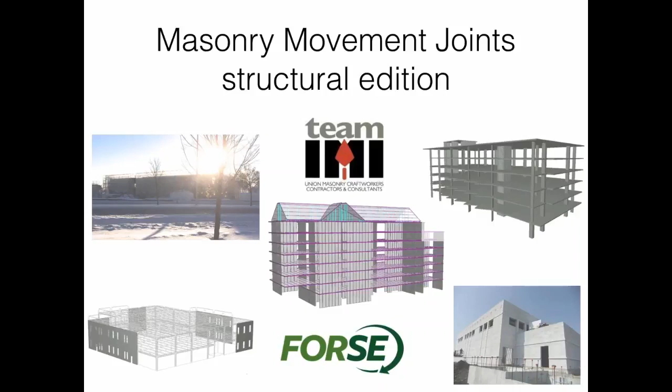All right, so what we're going to talk about today is masonry movement joints. You guys have probably talked about or thought about movement joints. A bunch of different things here.

So learning objectives: learn a little bit about movement joint definitions. You guys have probably seen a variety of these type of talks from the architectural perspective, so there's going to be some overlap, but I'm going to try to talk about why movement joints are important to engineers, why an engineer might say no, we don't need any movement joints, or we need more movement joints, or some of those different things. So there's overlap, but I'll cover why it's important to engineers or how you can help them out. I know you guys love to help out engineers. We'll cover movement characteristics of masonry materials and systems, movement joint purposes and locations, and then knowledge to design and detail movement joints and stuff like that.

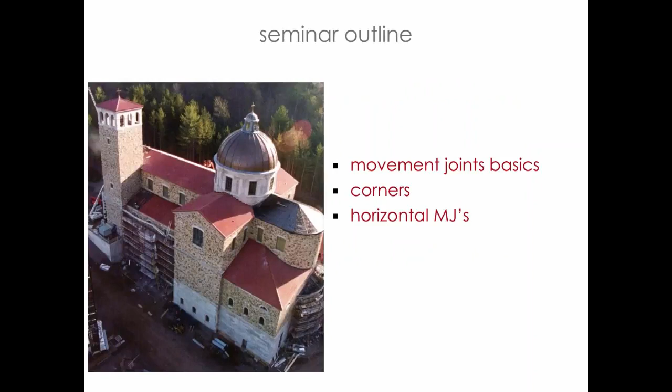So we're going to cover those basics, cover what goes on in corners, both for structural and for veneer. Talk about horizontal movement joints - I think that's a really good terminology, because sometimes we get a little bit confused about what's going on with those horizontal elements. We'll cover effects for structural, and then the all-important issue of when we have openings, and we have more and more and more openings - how do we deal with these openings in an effective way?

So, movement joint basics. The biggest thing about movement joints - and this is hard to see when we review projects, and we do that a lot for the Structural Masonry Coalition here in Illinois. My company does a lot of consulting work in Wisconsin, Iowa, Kansas City, New Jersey, and all kinds of different places. When we do project and plan reviews, probably the most heartbreaking thing I see when reviewing masonry details - well, there's a couple heartbreaking things - but one of them is when there's a note in there someplace indicating movement joints just based on a code reference, right?

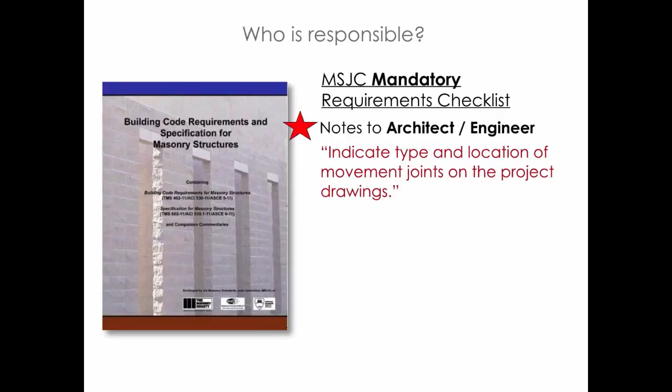What we really need to do is be very specific about where the joints need to be horizontally and vertically on our drawings. I think we really need to do a lot better with that. Maybe in schematic design we can throw a note in there, but even then it's probably not a good idea. And the other thing about movement joints - a lot of times when we talk about movement joints, there's a difference between veneers and backups, or CMU veneers versus structural veneers. So I'm going to talk about those before we get even deep into any of the pretty pictures that I have for today.

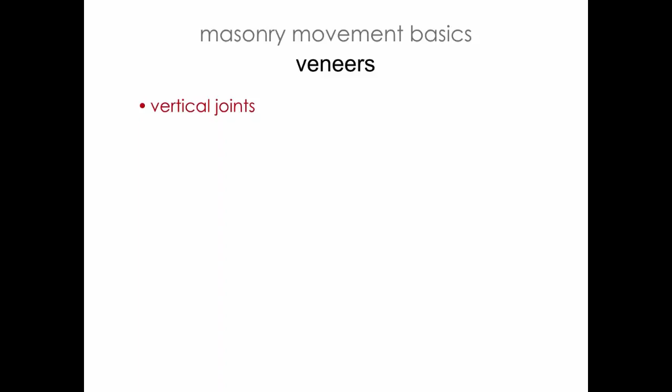So the vertical joints that we have are needed to prevent cracking. Anytime we have a veneer, what we're trying to do is provide a plane within a wall where the wall is going to be able to move, without forming its own movement joint.

That's what we're trying to prevent by putting these joints in there. We're trying to prevent that undesirable cracking by putting in this purposeful, essentially, a crack in the wall. Needed when there's a differential support.

Sometimes we have different conditions where we have veneers that are kind of spanning over different types of elements structurally. Sometimes there's differential support in how we support those veneers. So there's another place where we want to put a joint.

And then rarely, if ever, would you ever want to eliminate a vertical joint in a veneer. So I'm going to talk about when we maybe want to eliminate some of these vertical joints, but I'm not talking about veneers. Horizontal joints in a veneer, it's needed to allow for differential movement, and that's not the same as differential support. Differential support is for when I have a veneer in an elevation, maybe got two different elements supporting it.

Maybe one's a foundation, one's a beam, as we go on a slope site or something like that. So differential movement is the actual veneer and whatever it's holding, giving it its support. A lot of times that support is going to be moving vertically. It's going to be settling, especially if it's, and I apologize for any wood people, but if it's an inferior material. Wood isn't used because it's superior to brick, it's used because it's available and all these other reasons. It moves a lot.

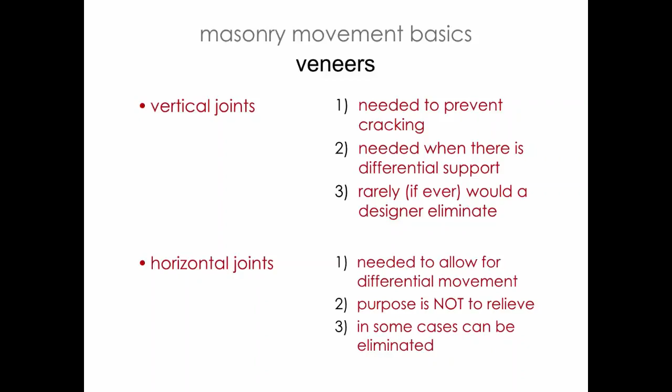So again, vertical joints, rarely do we eliminate them. Horizontal joints, we certainly can think about eliminating them. But this stuff is in the veneers—because when I flip over to the structural, the backup, the CMU, the stuff that's behind it, or if it's a single wythe, then it's going to be all applicable. Vertical joints, again, needed to prevent cracking—we want to prevent the unintended cracks from forming in the wall.

They can be used structurally, vertical joints sometimes are added to isolate a certain element. I don't know if you guys ever do design in a high seismic area where you get into specialty detailing for a shear wall element, and that's not something you necessarily want to do for the entire structure. So sometimes vertical joints are more than just thermal control to prevent cracking - sometimes we're trying to isolate an element structurally so we don't have to have all this special detailing.

for seismic response everywhere in a building. In some cases, we can eliminate them, and I think there's some cases where we absolutely should eliminate them. When I say eliminate them, I mean from the standard prescriptive ways you think about control joints. There's plenty of locations where we can move them, eliminate them, get rid of them.

I did a presentation a couple weeks ago in California, and they said, well of course you'd eliminate them, we have plenty of horizontal. Yeah, there's certain areas of the country where you just don't need horizontal or vertical joints in that structural wall. So in some cases they can be eliminated - for the Midwest, for 90% of the country that's not California. A lot of times we just get into the mentality that we have to have these joints in it.

We have to put them in, it's just what we have to do - there were so many problems when we didn't have those joints in it. Well, okay, yeah, common construction methods used throughout most of the United States and all over the world, you probably want to add them, but there's still certain situations where we want to eliminate it.

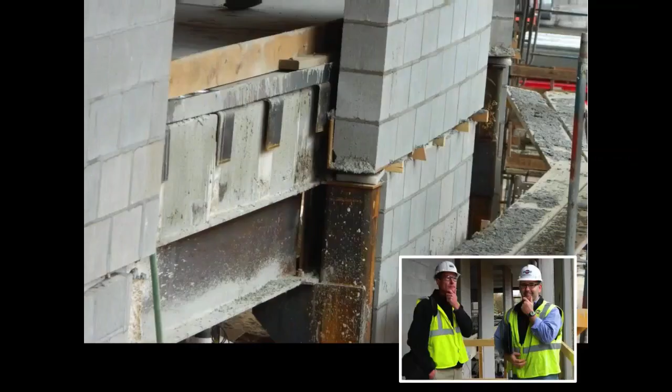Not anything that, because brick didn't need to be relieved. The backup, the CMU wall, definitely doesn't need to be relieved for many feet high - 28 stories, 30 stories, we're talking about some high vertical masonry. So that's just - and again I'm not sure why this happened.

This is a bad design. I can't say anything about it in a good way, but I'm not sure why it got into this project, or whether it's going to be common, or hopefully none of you guys ever see this. But if you do, this should raise some red flags, because masonry just doesn't need to be relieved.

Brick doesn't need to be relieved. We're trying to panelize these brick veneers and add these horizontal joints for specific reasons, for how we're tying to the backup. And so the thought process here is, we're not tying to a backup - this is the backup, and it can support itself. It's just adding more and more weight to the structure that's behind it, and it's just not something we want to get into.

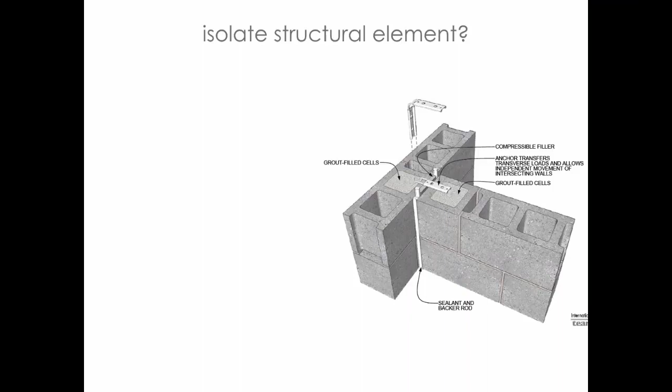So in terms of isolating those elements, it's not just for shear walls - I think that's a really easy example for us to think about, but also for partition walls. Partition walls within the current code - and I don't love the language - it says it's a wall that doesn't have a structural function. I'm like, well, but a structural engineer still needs to participate in the design of them because there's structural loads on this non-structural wall. But anyway, I think we need better terminology.

It doesn't have a lot of load, it's got some partition wall loads that are going to be applying pressure to it. If it's in a seismic region, it's got inertia forces due to its own self-weight that you have to resist, and stuff like that. But partition walls - what the code is trying to say is, I don't want to get any unintended forces in there. I don't want to drag in some unintended shear load or vertical load into this element. It should be a relatively simple element.

And that's why when we go into intersections, when we have an interior partition wall framing into an exterior wall, a lot of times it's a good place for a joint - because it's just more complicated than it needs to be. And it's not a partition wall anymore if we suddenly have a hard joint there, creating that T-section.

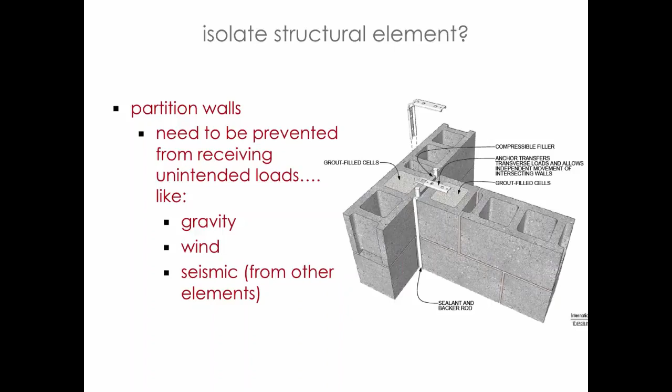Yeah, so it can be gravity, it can be wind, it could be seismic from other elements. In seismic events, it's got its own self-weight it's got to take care of, that structural load, even though it's a non-structural wall.

This is what I would call the more common case, right? Maybe we have a bearing wall taking the out-of-plane pressure loads on the walls, but then maybe there's one element taking the out-of-plane pressure loads, the vertical loads, and the shear loads. And we have openings, and we have 24 inches past the edge of the openings where we have to place bars, and we need all this horizontal reinforcement because it's a specially reinforced masonry shear wall. It's kind of a big deal.

But we don't want to do that everywhere, so sometimes we'll add control joints to isolate those locations.

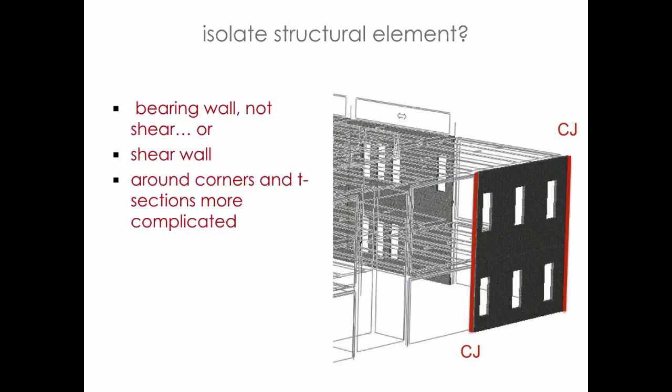And so I say that, and I think I have to put this little caveat in here. Sometimes I say isolating, and everybody's like, yeah, we've been isolating forever — we now isolate these shear walls because there's openings. This is not what I'm talking about. These are not places where I want to put control joints just because there's an opening there. We're going to get into this in a lot more detail.

Shear walls should look like this from a structural engineering perspective. We can go well past those openings. Maybe we still want to isolate them — we don't want to go too far to have to add more than minimum reinforcement. But it's not openings that are going to create the need for control joints. But like I said, we'll talk about that.

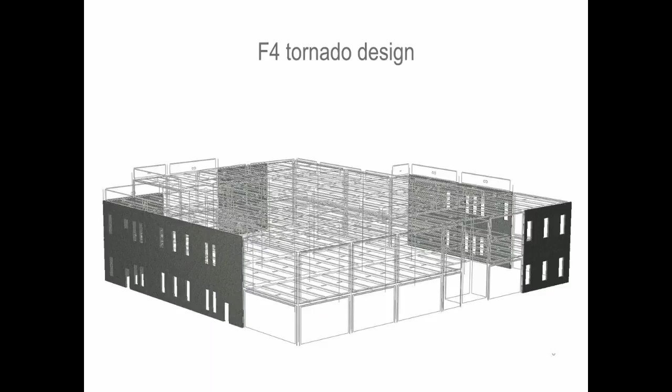So I guess movement joints have some three basic factors. All buildings move. CMU shrinks and bricks expand. So we kind of have buildings moving around vertically, horizontally, with lateral loads that are going to be applied on structures. We have masonry that does shrink.

If you're an engineer, when I say shrink and I say movement, all of a sudden I start correlating it to concrete, and it's not the same — it's not the same minimum reinforcement requirements that you have with concrete. It still has some thermal loads similar to concrete, but again, it's a lot less volume. So when I say shrink, I mean shrink, but I don't mean the same thing as when I talk about concrete elements.

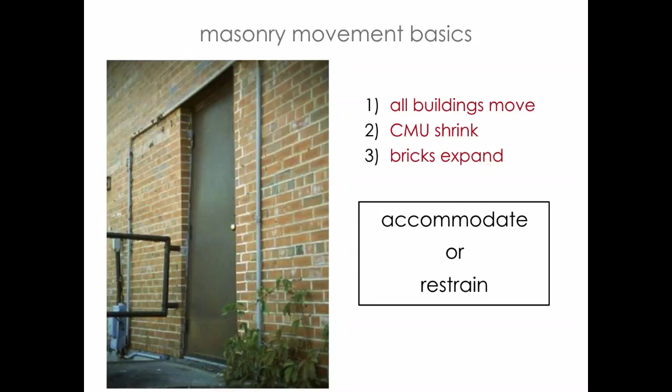All right, so movement joints — we have CMU, we have the backup wall, we have a control joint within the wall, and it's really a different thing once we get out to the front, you know, expansion joint. I'm not so touchy about it. I think other people get a little bit more touchy about it, but I think it's a good terminology issue that we should consider.

Just like the whole relief angle thing, you really need to think about what the joint is doing, how it needs to function, and the purpose for putting it there.

They don't need to align. They shouldn't align. I can't think of why they would ever align. Somebody told me once why they thought, but then I forgot about it, so it must not have been too important. It's usually not something that I think would be good for overall use of the building — there's just no purpose in the two of them aligning.

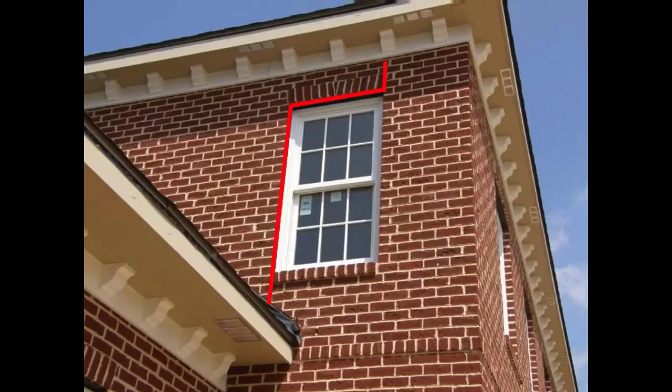The isolation joint - when I was talking about differential supports, I think this is a really good example. Again, this is a veneer. We're looking at how this would be supported, maybe here by the foundation. But then if I get up over the roof, it's not going to go all the way down the foundation - you probably don't have brick going all the way through the roof and wall system, it's going to be supported on the roof. So we probably need some sort of joint there, to isolate that element, go around the window and allow it to move vertically different than the piece sitting on the foundation. We can see a few more examples here.

Hopefully you guys weren't expecting me to talk about colors. I'm an engineer, I'm kind of colorblind. Every time my daughters ask me for clothing advice, I'm like, are you sure you want this? I can give you some advice, but it's really not going to help out too much. So in terms of the color of the joint material, you're kind of on your own, I can't help you there. But location-wise, based on what we're doing structurally, I can help you with that.

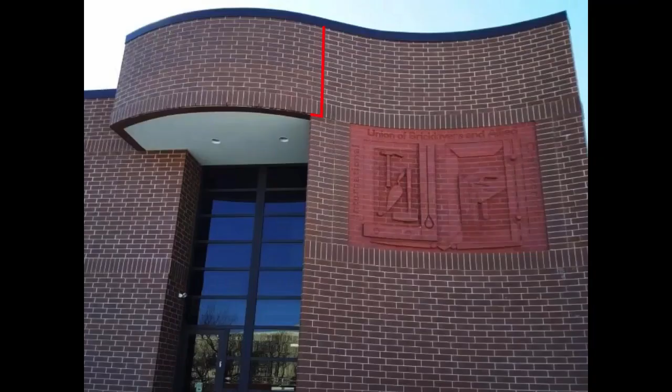This is another good example. Again, it's not differential support in terms of one sitting on a foundation, but this is going to just move differently because it's over this opening. That lintel is going to be moving, especially this kind of cantilevered curved veneer. We need to look for those type of situations in our designs. If we're creating something aesthetically pleasing with irregularities and stuff going on, this just feels like it's going to move differently - it's going to be deflecting and twisting and moving, and that lintel is going to be doing something differently than what we'd have going over just the foundation. So we have to think about that as we're locating those joints.

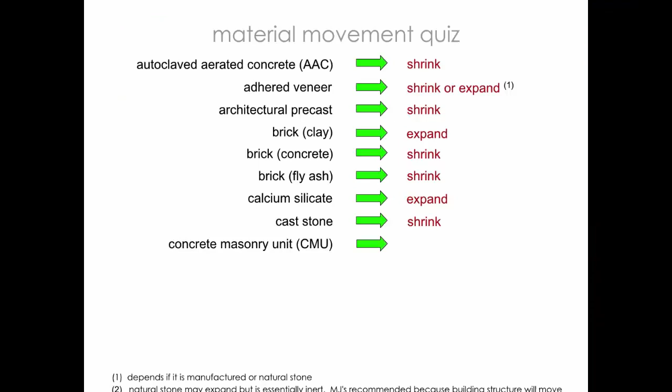All right, a couple more - we have stuff going all over the place. A lot of it, the clay products, certainly the natural stone, which got a little note down there - sometimes it does, sometimes it doesn't. Terracotta tile, brick, all of those things are going to be expanding as they take on moisture, they're going to just grow over time, and they're never going to come back to the initial place of when the product was made. So it's kind of going to be constantly growing over time. All the concrete, cementitious products are going to be shrinking over time. So it depends on what you use for veneer. A lot of times I'll talk about an expansion joint in a veneer, and that's not necessarily always the case if you got a different veneer material than a clay product.

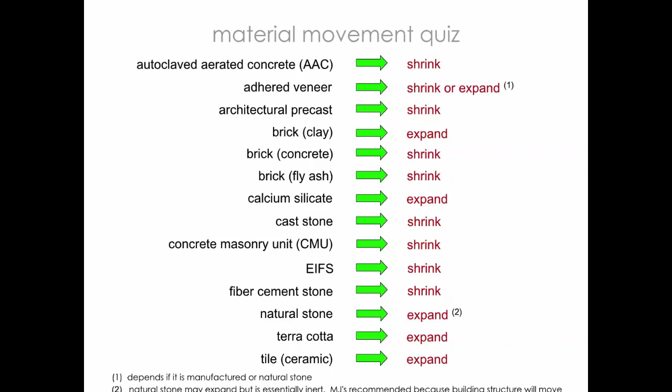We talk about constructional joint widths, and I think sometimes in these seminars we can throw some of these numbers out. I'd be purposeful about this stuff, you guys. Put this stuff in your notes or on your drawings, and try to be as specific as possible, because sometimes a contractor might say, hey, why is this dimension here - but that at least starts a conversation. I think that's of the utmost importance, is making sure we're putting down our design intent as much as possible. Yes, it's going to require a little bit more time as some of these nuances come in, but it at least creates that conversation. I think that's always very, very important in our designs.

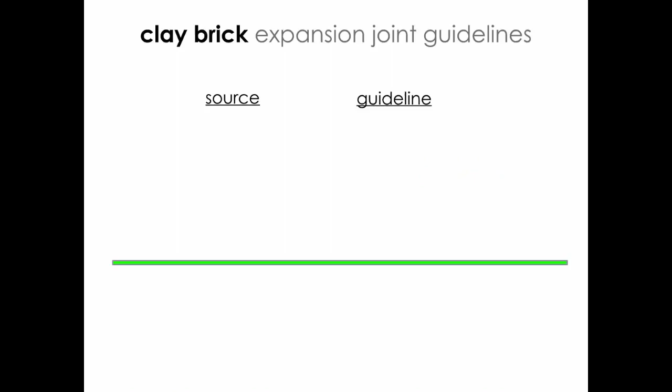And your clay brick joint is going to be a little bit wider, because that brick's going to expand and fill in that gap. There are some nice little guidelines here for what BIA gives for the distance between where you would need joints, and IMI.

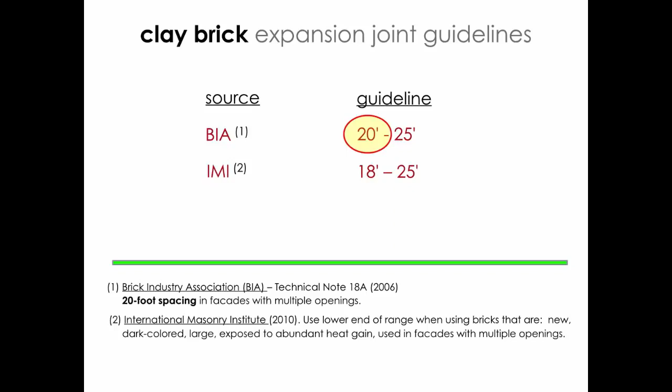20 feet, I think, is kind of an accepted distance that we would have there. And then when we get into the masonry or the backup wall, it's 1.5 times the wall height, not to exceed 25 feet. Some of these are things that I think are good for most situations, but I like to challenge things.

If you got my bio, I'm a software geek. I'm a guy that travels with a bigger technology bag than my overnight bag. Everybody's like, you want me to take this bag? It's bigger. I'm like, no, that's my stuff. You can't touch my technology stuff. Take this little bag, it's got all my clothes in.

That's not important. What I like to do is take these industry standard things that are out there, empirical designs that cover a lot of situations, but I like to challenge some of that. Does it really need to be at this distance vertically or horizontally? Let's analyze it, let's think about it, and let's look at it. We'll talk about that a little bit.

But like I said, in the construction documents, we have to be really purposeful. Put those control joints on plans. Since we created this slide, on plans is kind of the common way to portray the information structurally.

In my last 6.5, almost 7 years of being a consultant to IMI, I've actually convinced a few engineers to put control joints on their elevations of their masonry walls instead of in plan, which I think is a really good idea, especially if they take to heart some of the things I'm talking about regarding reinforcing, analyzing, and design, being very purposeful about lintel reinforcement and reinforcement within a wall. So I don't think that's a bad idea.

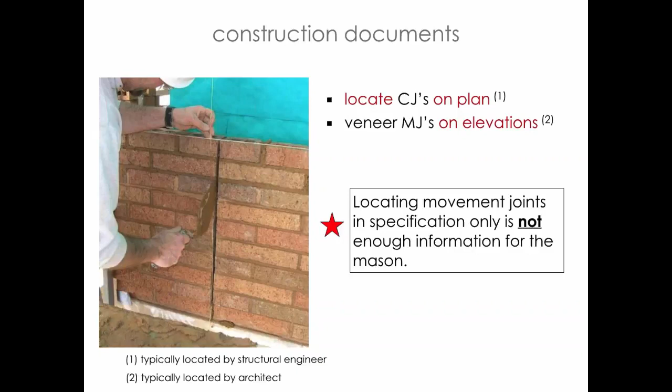Locating movement joints in specification language or in general notes, or even having any notes in there to say anything other than see the plan, see the elevations, right? If you could put anything in there, don't create a conflict of information. Make sure that you point to the plans or elevations that we're talking about.

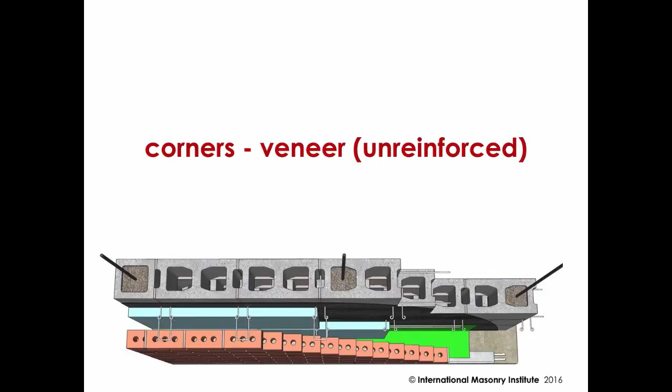Corners, sometimes when I talk about corners, looking at the veneers and cracks that you have there, this is mostly what you want to think about for an unreinforced type of construction or unreinforced masonry movement joint situation. So a lot of times we can put on the plan, or have this mentality, that they should be at 20 feet on center. So anytime you have a plan, 20 feet on center, 20 feet on center, going around the corner, we have to think about what's going on in the actual corner.

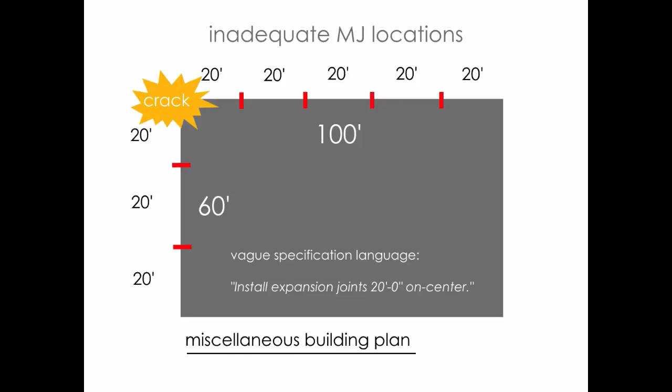Because we have too much thermal load, or moisture load, that's going to be created by those bricks expanding. That's going to be coming from two different directions here and causing a little bit of cracking there. So you can kind of see how both of them are going to be... I really can't pick anything up with the sun.

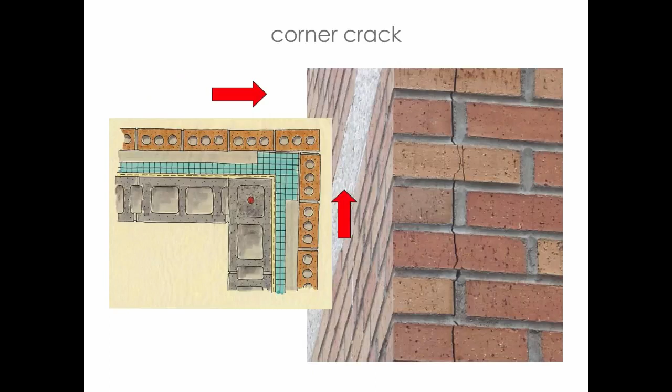You add the distance around the corners. There's a really good way to think about it. A lot of times you probably have a shorter distance in one direction, maybe a couple feet, and then maybe close to 20 feet in the other. So that just prevents that growing from kind of coming together at a corner and cracking.

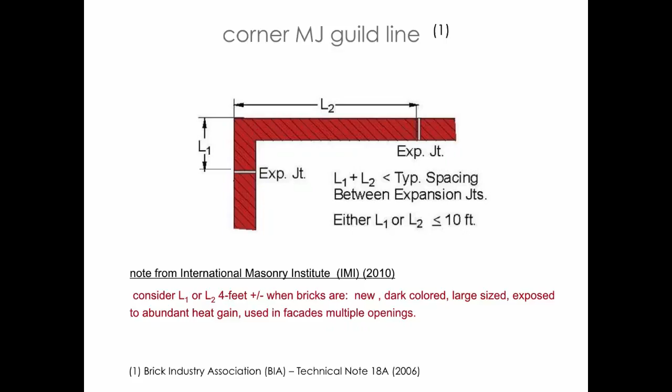Right? So this is sometimes an office standard that I talk about. If you're adding those distances around the corner, sometimes we already have kind of this preset, 2 foot, 2'8", or something like that, that contractors like to use. So it's usually not like 10 feet and 10 feet—it's usually got a shorter distance.

And then those inside corners, we've got to make sure that we give our veneers places to move, even when we go inside the corners, especially again—we've got a couple different products going on here at this cathedral up in La Crosse, Wisconsin.

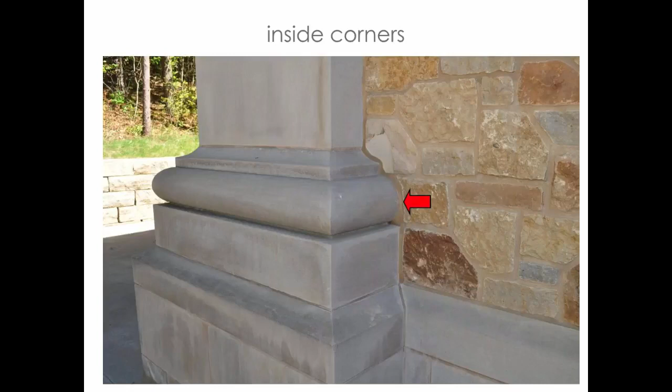Yeah, and then especially when you get to those acute inside corners, I think that stress can be even easier to show, and show some distress with the crack at the corner, if we don't have joints nearby.

All right, so shelf angles, veneers, and how it affects backups. I think shelf angles—again, or relief angles—are things that certainly you guys need to think about. You need to talk to your structural engineers about what we need in terms of shelf angles.

Certainly having those horizontal movement joints, those shelf angles, they're in there to allow the brick to grow, so that you can have a gap at the top of the brick, below the shelf angle, so that it can move and grow a little bit and not put undue stress or create differential movement with the structure behind.

So to think about the shelf angles, they certainly are an added cost, right? And so we have to think about that as we're thinking about, well, do we really need them? A lot of times we do, but sometimes I think that we could start to challenge what's in the code in terms of an empirical design. Functional, liability, gap corrosion, flashing, thermal transfer—all kinds of stuff going on with these shelf angles.

And there's a couple of slides in here that kind of show some what I call creative ways to create an offset shelf angle. I think that those are good ideas for mitigating some of those issues. But I think, again, maybe eliminating them altogether might be the right design for your project.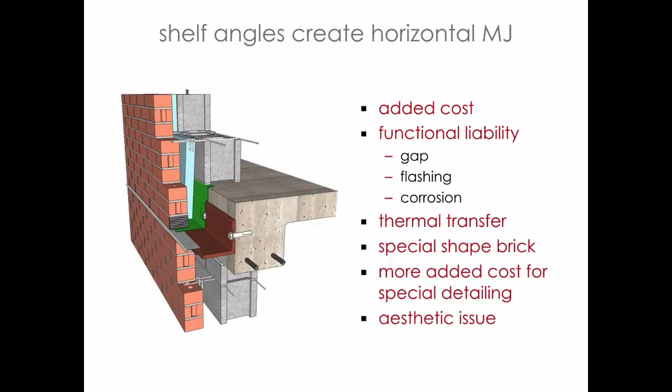Special brick shape, added cost for special detailing. Again, aesthetic issue—that was definitely not my bullet point, somebody else put that in there. Aesthetics, I'm an engineer, I don't understand what that word means.

All right, so shelf angles over metal studs or over wood construction, right? You guys are all really familiar with this note, right? It's at the height that you can go with brick veneer, or with a veneer, before you would need a shelf angle—is 30 feet.

And so how is that number determined? Right? How did they come up with that? It's based on a bunch of data of existing structures and kind of what worked and what didn't—what height did we start to see some problems with the veneers growing and having some issues with how the veneers are then tied to the backup structure.

And again, when we're tying into why are we picking on metal studs and wood—it's not because the masonry industry doesn't like them. Maybe they don't like them, but that's not the reason why. I didn't mean to touch on that sensitive issue, but what I mean is that it's a material that moves.

It's an inferior material from a strength perspective. Brick is not something that deflects and moves down and shrinks due to its own weight. It's something that can withstand its own weight and in fact grows a little bit over time. So it moves vertically up versus the structure behind, especially when it's wood or steel, which is coming down, shrinking, moving in the opposite direction.

When we go beyond 30 feet, we start to have problems with that differential vertical movement, and we start to need to look at different types of fasteners between the veneer and the backup. So we start to have issues there because of the structure behind, not because of the brick.

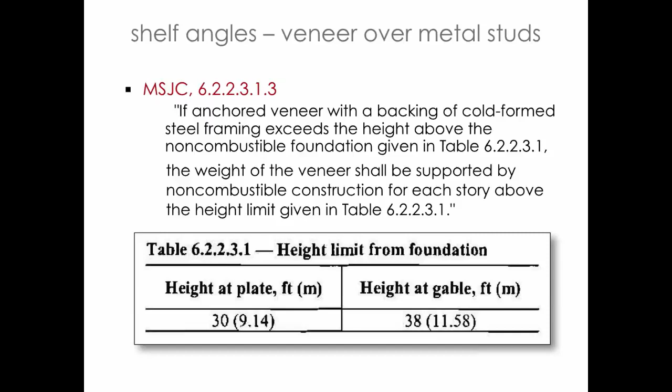And so I think that mentality is really, really important. The brick can go very, very high. So if it's a CMU backup wall or a concrete backup wall, or a different backup wall that's got a similar strength, more equally matched within the design, then it's not going to be moving differently vertically, and we don't have to worry about that differential movement. Again, 30 feet is what we have to deal with when we have those stud walls.

At gables, we can go up to 38 feet. But what I'm thinking about here is that sometimes people will look at masonry the same way they look at that wood or stud provision, which just doesn't need to be used, because again, that masonry is not moving. It's an equal partner in the vertical movement of the system. So those fasteners and ties between the two don't have to accommodate a lot of differential movement. That's really, really important.

If we get into a structure like this one, a 4-story wood structure with no shelf angles, as the project was built, the brick is certainly fine on its own. We can look at the brick, we can do an analysis of it, and I have a couple slides here for how to do that. But what we have to do is make sure that all the penetrations coming from that wood structure behind, going through the brick, accommodate for that differential movement.

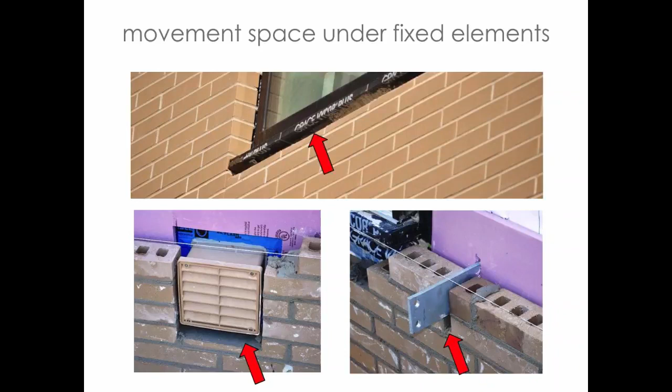And then all the fasteners between the veneer and the backup have to accommodate for that differential movement. So all those little gaps around all those little penetrations, that's what that's for—so that the structure behind can, in fact, come down over time due to the occupancy and due to the self-weight of the structure.

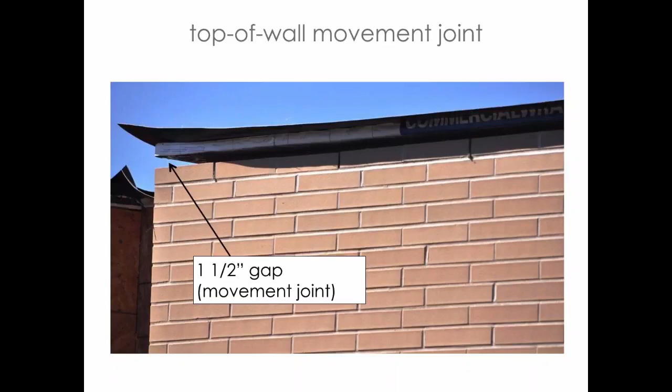And again, I have a couple slides here that show some of the analysis. But what do you do when you have a shelf angle? Some of the other challenges were thermal transfer and some of that stuff. There are some proprietary products—I think we might even have some here, or a distributor that can show you some—just designed, maybe a vertical channel and a horizontal shelf angle, but something to hold off and prevent that thermal transfer.

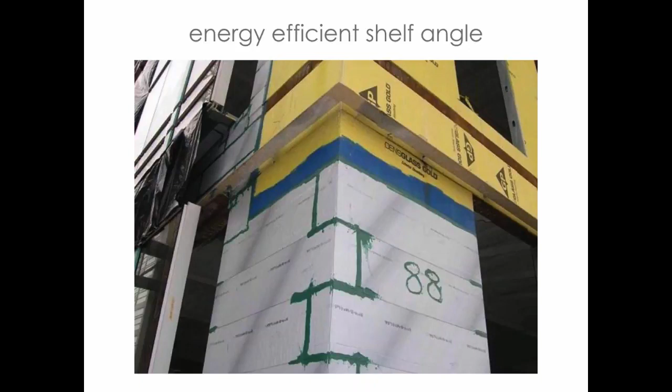Maybe keep down that angle size so we can keep the leg of that angle within the bed depth of the brick, so it doesn't have to have a really unique look at that joint. We can eliminate or minimize that thermal bridging by utilizing CMU walls. The calculation really isn't that bad when we have something else behind it. I mean, with the fasteners and all the stuff you have to do, I'd be an advocate for using similar materials in the backup and the veneer.

But if you wanted to use that inferior material that's going to be shrinking, that's going to be moving, coming down as your brick's growing, it's a simple calculation. So when I talk about 30 feet or 38 foot at a gable, versus this slide—this slide's not that complicated. I mean, it's brick movement. There are a few different items you're going to have to calculate: what is the brick deflection, or the delta for your brick due to moisture? What's your delta due to temperature? What's your delta due to compression?

That one's kind of funny to calculate because you add the moisture, you add the temperature, and then you subtract or take off the compression, which is pretty minimal, right? It just doesn't move, it's very gravity defiant, it doesn't like to come down. So then you have the structure behind, the structure shortening that you have due to loads on the structure. What you have to do is look at the differential between the two. And that tells you the type of anchor that you need, and the gaps that you need for the penetrations.

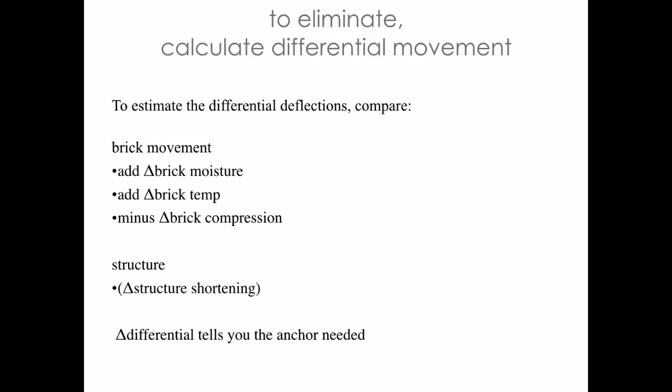That's where I really love finite element analysis of these veneers. People are like, you do a finite element analysis for veneers? I'm like, yeah, it's kind of cool. So I'll show you a couple slides in a little bit. It's just running an analysis of what the structure is going to be doing, moving, deflecting, shrinking, and then doing a finite element analysis. I think it's a really good way to determine what the overall brick movement would be.

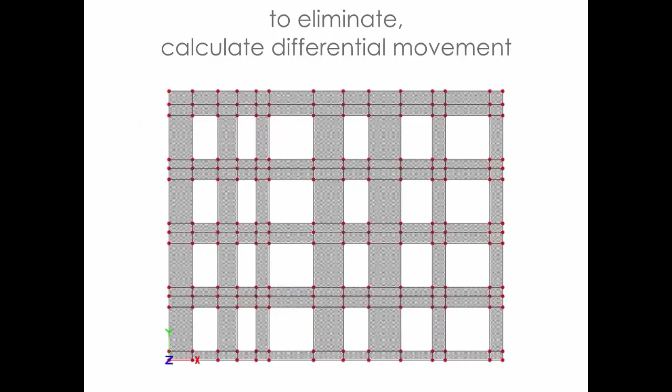But it's just not that complicated. It takes a little bit of time, it takes that extra step. I agree, but sometimes taking that extra step, eliminating those shelf angles, is going to save a ton in construction dollars for the shelf angles that you have to put in there and all that joint material and stuff like that. So we really want to think about this, and think about the types of structures where it would be a good application. I'm not saying every time, somebody will say, but Sam, it's probably not what you want to do at every structure. Don't do this in every structure.

But you do have this option. You have the option to look at veneers differently. You don't have to go by those empirical methods and just go to 30 feet, stop, put a shelf angle, then move on for the last 3 feet of your building. Think about this, it's not that complicated, especially when you're an engineer that likes to do finite element analysis, which none of you are, but you guys all know one, right? Okay.

All right, movement joint locations in the CMU or in the backup, and how it affects structural capacity, how it changes the in-plane wall design. Again, I'm going to bore you guys with a few numbers just because I think it's really important. I'm trying to convince you to never put a control joint in a structural element, for one. And then if you see them in these locations that I say don't put them in by an engineer, make sure you call me so I can call the engineer and have a chat, because it's really affecting the performance of the design in an adverse way.

So we want to make sure that we're giving masonry its full due. It's got a lot of capacity, and we don't want to just add one little joint in one little location that's going to bring down the capacities by 60% or 70%. We want to use the material that we have on site.

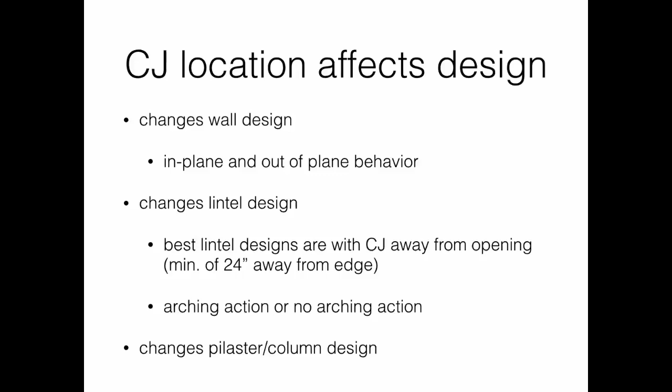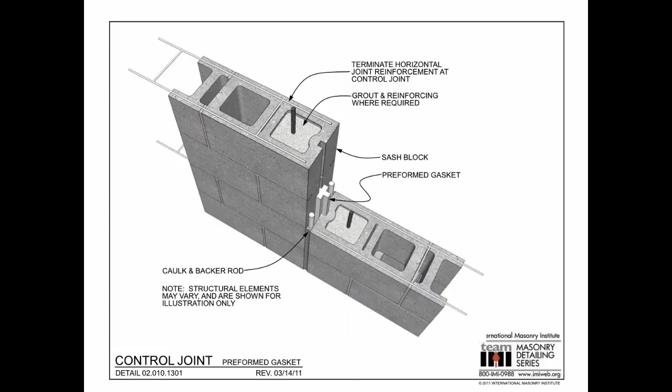You can do a gasket. You have a couple different options there within your backup wall.

Control joints, again, at corners, when I talk about isolating elements, a lot of times going around corners or doing T's, we need to think about how our wall really wants to perform structurally. If we're going to put control joints, if we're going in that direction, we're not eliminating them. I'll talk about that in a little bit, but if we are, a lot of times a corner is a good place, because it keeps the analysis reasonable and the movement of that element reasonable for most walls. So we have control joint at the corner.

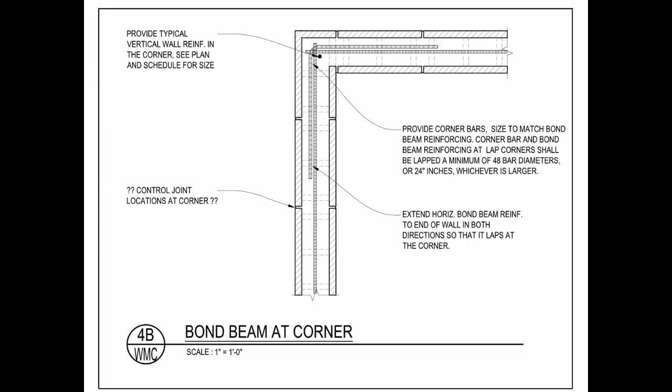I think that's something that we need to think about when we look at bond beams, because bond beams, if we have a continuous bond beam through control joints, that control joint's just not operating as a control joint. It really does need to have, say, a smooth bar at the control joint. You need to think about that in your bond beam details. At that T-wall, you could have the little hook that I showed in there before, or a smooth dowel if that's what the contractor prefers.

So all things that we have to think about as we look at different details in our design. Again, smooth dowel, I think, is what would be appropriate to allow that wall to move.

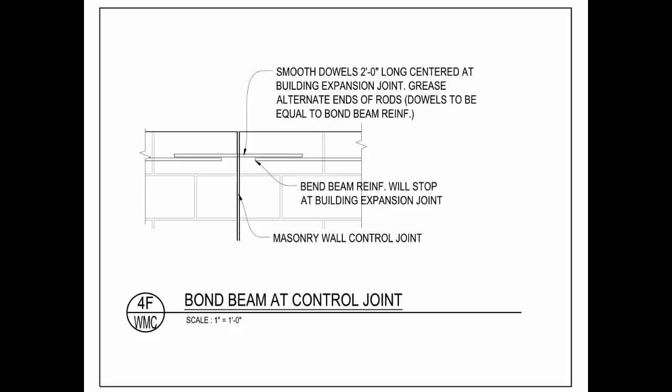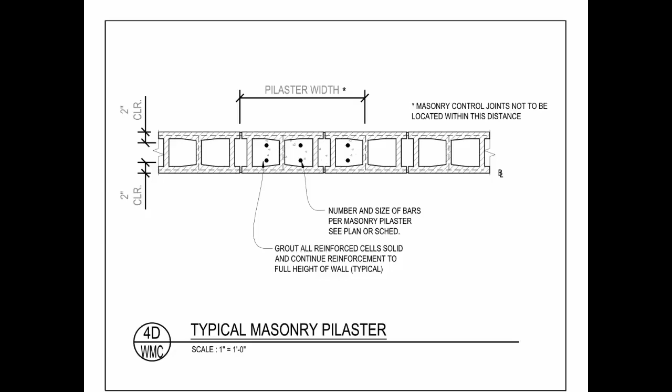Other things that affect control joints in a structural wall, when an engineer is designing, say, an in-wall pilaster. Those are real things. We're putting enough reinforcement and grout within that wall to eliminate stuff like steel columns that don't need to be in there, that don't have as much capacity as this anyway. Well, when we do this, we got to make sure that control joint doesn't just fall in here. And so if an engineer is not locating them, how big's that pilaster? Where's the pilaster centered? All of those things are things that an engineer really needs to be a part of.

Sometimes we have these larger pilasters. Sometimes those should have control joints. Sometimes they should not, depending on what type of design we're doing here. Again, we want to make sure that it doesn't somehow land within the pilaster. And I think architecturally that would look kind of silly here too. So I think we're all on the same page. That wouldn't make a lot of sense.

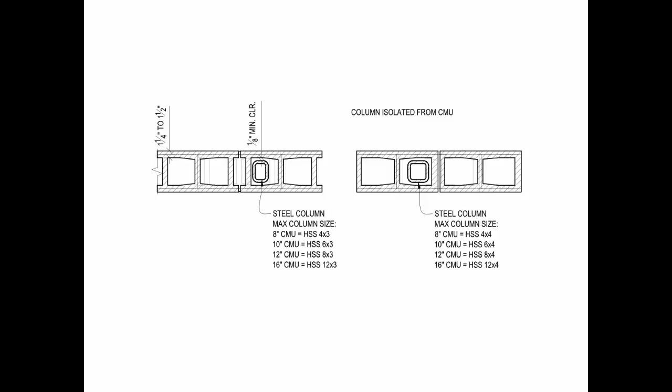But coordination required. If for some reason you can't talk your engineer into doing that in-plane pilaster, which is a good design, and I'd be glad to talk to him, but in case one slips through the cracks, anytime that we have steel that gets buried within a wall, that's probably a location that you want a control joint, because most likely that steel is not going to fit really well within the masonry. And so in the pictures in the projects that we've seen, masonry face shells shaved down, or big plumbing pipes that go in those walls, think about control joints at those locations.

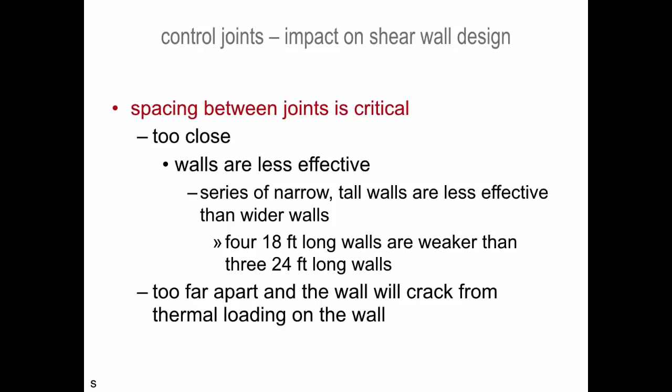Looking at control joints, looking at what they need to consider detail-wise, just looking at the capacity, I'm going to throw a couple examples up here, because I think it's really important. The spacing between control joints is critical. A long wall is going to have a lot more capacity for the in-plane shear design. So what does that mean? The wind that's going to be applied on a building, if I have a really long wall, I'm not going to need a lot of shear walls.

I'm not going to need a lot of special reinforcement if I have a few long walls. If I have a bunch of short walls, I'm going to need probably all of them because they just have so much less capacity in design.

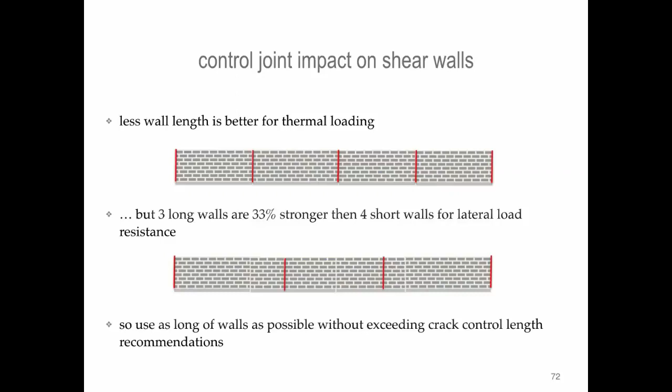Even in an example of just adding one more joint, for the contractors that are trying to be responsible, trying to make sure they don't have any cracks, and they just throw that one extra joint in there, that can bring down the capacity by 33%. That's quite a bit, especially when we have a lot of buildings that have a lot of exterior glazing, windows, sometimes all glazing on the outside, and sometimes the masonry gets reduced quite a bit for what would be there for lateral shear wall. So that one joint might be the difference in a design working or not working.

Openings and how they affect structurally, the difference between veneers and structures. This is probably the biggest part, to where with openings, this is why control joints are probably going to all end up in different locations between the veneer and what we have in the backup wall.

I think this document is used very well by you guys. It's not used very well by your engineering counterparts. I really mean that, because what this document is really meant for is trying to identify locations within unreinforced masonry that you need a joint. You need a joint in this location because it's unreinforced. I need a joint in this location because it's unreinforced. I need a joint in this location because it's unreinforced. So it's got a lot of that information. It doesn't have a lot of information on when it is reinforced. It's got a little, right? It's on the last pages, and sometimes people skip those.

But it gets overused because I think people use this first diagram, this first picture, and engineers are just maybe like little kids - they like pictures and they get attracted to pictures. And this first picture is pretty cool, right? It shows all of those locations at the window openings, change in height of the wall, pilasters. Maybe we want to have control joints in all those locations. All makes sense for an unreinforced design.

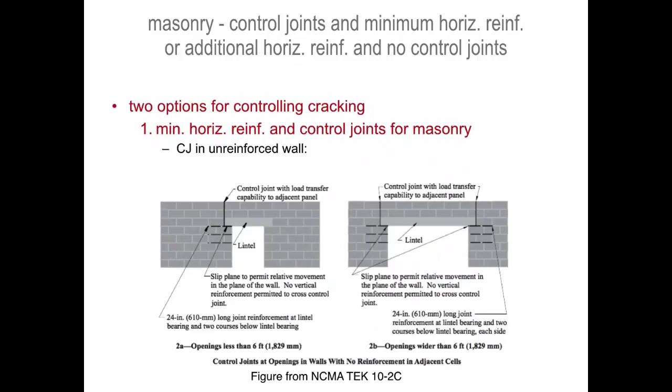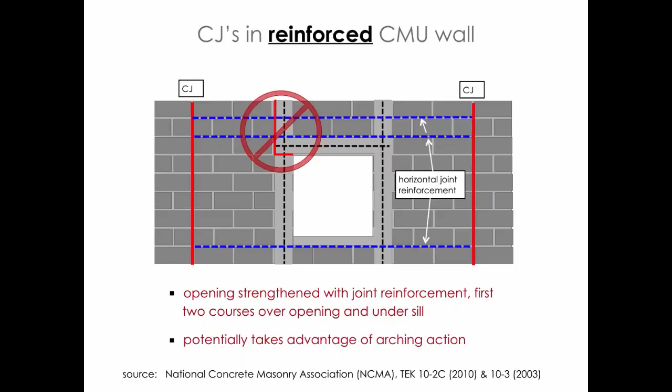This looks pretty familiar, right? So what I'm saying is, with a structural wall - whether it's going to be a veneer, a single wythe wall, a veneer backup, or a single wythe wall, whatever the structural element - as soon as we start to add reinforcing, that control joint can't go here. With the way that it should be reinforced, with the reinforced masonry lintel and a vertical jamb reinforcement, control joint can't go there, or it shouldn't go there.

So in fact, when I said they overuse that guide, if they go to the last pages of that guide, that's when they see these pictures showing the joints away from the openings, reinforced walls. So that's why they just end up in different locations. Openings create a completely different scenario for veneers and what you have for backups. So they don't need to be in the same location, and oftentimes they just don't end up in the same location because of some of the rules that we have here.

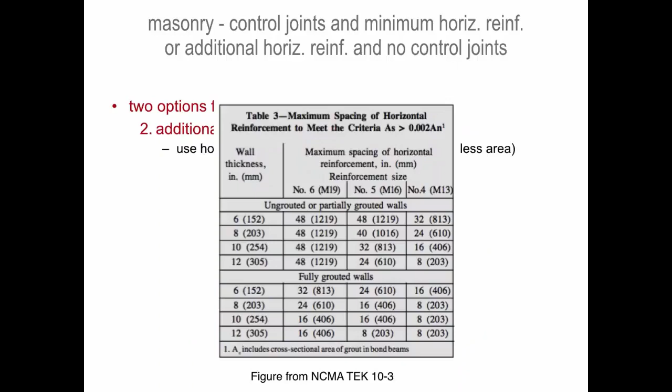Within the next guide - and these NCMA TEK guides are really, really good, if you guys haven't used them, you should definitely use them - this TEK guide is another one an engineer really should get his hands on, because he gets a really good understanding for why reinforcement or why control joints are located where they're located.

Say that's 25 feet or something like that - that can go to 30 feet, that can go to 40 feet, that can go even longer if you want to increase the amount of horizontal joint reinforcement that you have in a wall. A lot of what we have in there is kind of this empirical method of: if I have just common joint reinforcement, this is how far I can go with control joints. Or if I add more reinforcement, then I can go even further. And within the end of this document, it also talks about eliminating control joints altogether.

I know when I bring this up, people say, oh my God, Sam, you can't talk about this, because we added joints back in because we had problems. And yes, we added joints because we had problems in masonry when we didn't have a lot of horizontal reinforcement, or no reinforcement at all. We had a lot of unreinforced structures historically, and that's why we started putting in control joints. Well, that doesn't mean we can't add enough reinforcement in a masonry wall to not need control joints.

When I talked about this in San Francisco, they said, yeah, but they have a lot of reinforcement in there because it's a wall that's needed seismically to have a lot of vertical and horizontal reinforcement to respond to those seismic loads. So they just don't need control joints other than to isolate those structural elements. This is kind of a given there.

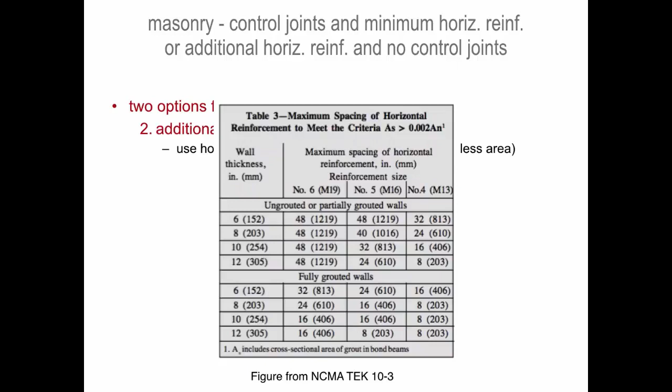It's just not as common here because we've gotten into this mentality that we need to have control joints. Well, you need them in unreinforced walls, and you need them in certain locations for reinforced walls, but those can be moved, they can be changed, they can grow if we increase the reinforcement. If we increase the reinforcement enough, we can eliminate them. I think it's just important to think about.

So the control joint locations in that guide for veneers just don't apply to this. And like I said, if we switch over from joint reinforcement to horizontal bond beams, I even need less, and I probably don't even need those. So it's just thinking about what situation you have.

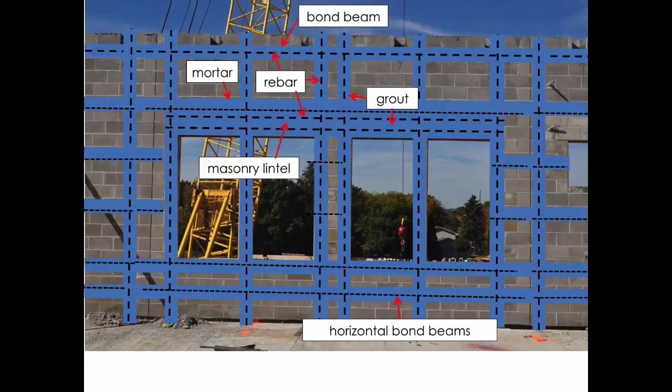Again, this isn't one-size-fits-all. This doesn't apply to every design. A lot of common masonry walls should have vertical joints in the Midwest just because we don't have a lot of projects that require all of these bond beams. But this is a good option, a very good option for certain designs.

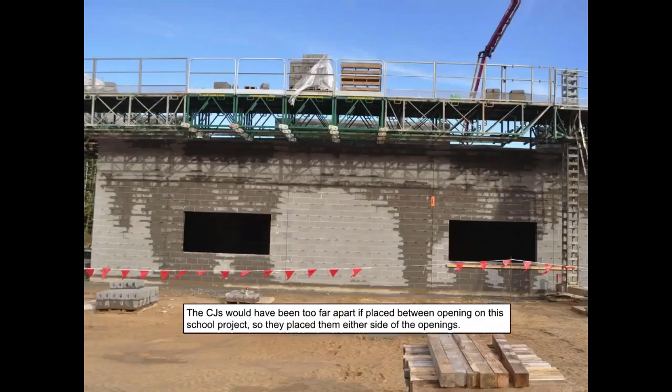Just a couple projects here where we can see those joints getting moved away, and I think there's a robustness you can just kind of see in these pictures. When I don't have a joint at an opening, you can just kind of see that it's going to be a lot more rigid if I push on the structure in the plane of the wall, and it would have a lot of resistance to movement.

I think the last one I'm going to end on here is a project we got involved with in the Minnesota Coalition. They were looking at putting control joints at every one of these pier locations, because they couldn't go more than 30 feet. So to go to two dock doors, they would be 36 feet. That just wasn't going to work for their design. So what do we do?

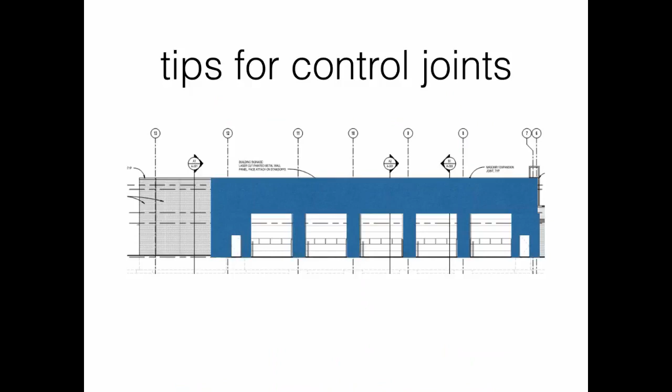We take this design, with all those pier locations, and we just eliminate them. We take this reinforced masonry lintel and make it continuous across the top of the openings. We have reinforcement at the top of the wall. So we design for that area of the building because it just doesn't make sense to put control joints in here. It's not going to be good for the building use.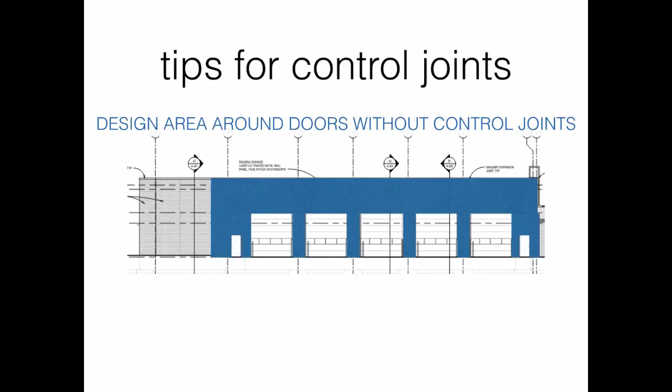It's not going to be good architecturally. I think it would look bad, but I don't have an aesthetic eye, and I'm colorblind, so I don't even know what color's on the screen. But we just don't need them engineering-wise because we have enough horizontal reinforcement. Now, I'm not saying for that building to just ignore typical construction and control joint rules.

For the rest of the building, go back to the typical rules for control joints. That's fine. It's not that once I do this for this elevation, everything's got to go without control joints. That's not what I'm saying.

All right, we're getting close. So, loose lintels. People ask me about that. I think those are good. They allow the veneer to work separately, on a separate set of rules. As long as it's a reasonable span and a reasonable loose lintel angle that we can design, that's fine. Anytime we get into fixed lintels, we have to attach the lintel to the backup. We have differential vertical support systems going on. We have control joints in the backup now that we have to consider in the veneer. So then they maybe have to start matching, like the gentleman on my left that I can't see.

I feel like I got in a car accident, right? He's got like one of those head braces.

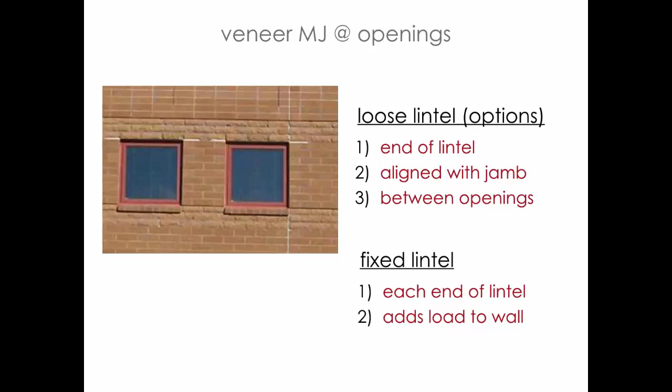No, so those fixed lintels do create a new set of rules that you have to consider for your design, for your veneers and your backups, and there's going to be a lot more coordination in your design. Different lintels - there's the loose lintel, and I'm going to pick on the fixed lintel, that steel lintel, in a little bit.

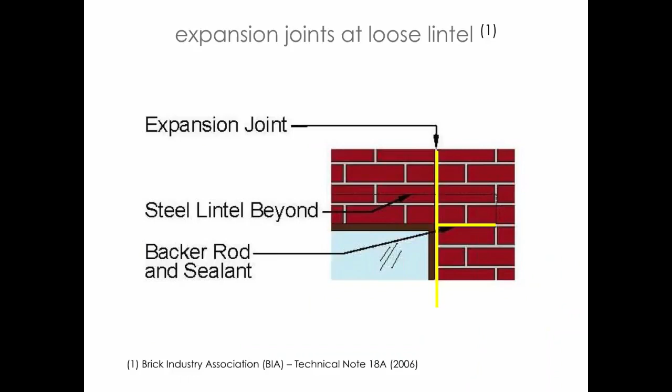Loose lintel going behind backer rod and sealant, having the joint going vertically, have it going horizontally, where you have steel there. A little bit on the perforated shear wall, when I'm talking about getting them away - and I'm getting a little short on time, so I'm going to flip through a few of these. What I'm talking about is getting rid of that one joint, right - that allows that perforated shear wall to have 3 times the capacity. And this is not a hard analysis to do with finite element analysis.

It's very much second nature to me, but not second nature to structural engineers that you work with for masonry. It's very much second nature to them for steel, for concrete, for post-tension concrete, for all kinds of designs, so it's familiar to them. They just need to get familiar with masonry and finite element analysis. We just did a course on it in Central Illinois, and I'm sure we'll do a lot more. It's not that complicated. It's definitely a new material, but it's going to be very similar to what they're dealing with in some of those different concrete applications.

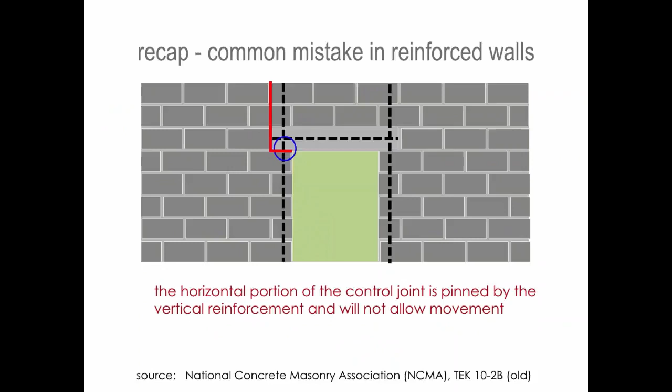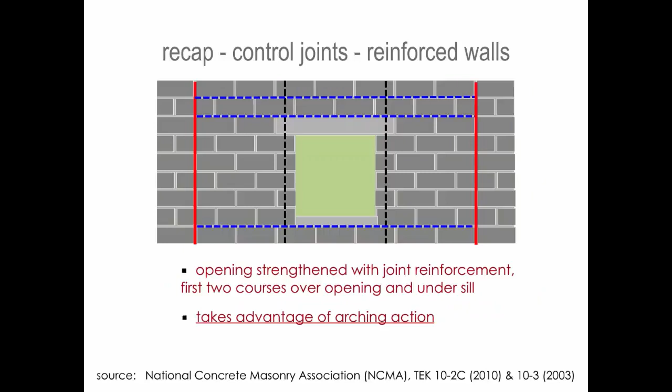All right, just a really quick recap. This control joint, unreinforced, right - that's why it goes to those locations in veneers. This doesn't work when we get into reinforced walls. We want to make sure those joints get away from the openings, and let the masonry lintels and masonry jamb reinforcement prevent any of those cracks from occurring at those corners, which is what you're trying to eliminate. So since I said that, somebody's going to say, well Sam, we don't use masonry lintels.

Well, I'm going to come back and we'll talk about masonry lintels for a full hour, but just a really quick snippet here: masonry lintels are going to be economical. They match the wall, move at the same rate as the wall, build in place easily 6 to 10 feet. A lot longer spans are certainly possible - in Michigan there's one that's 27 feet, and I hear stories of 30, 40 feet. Again, we can do a lot with masonry as long as we have the depth to do it, and in most cases we have the depth to do it in design.

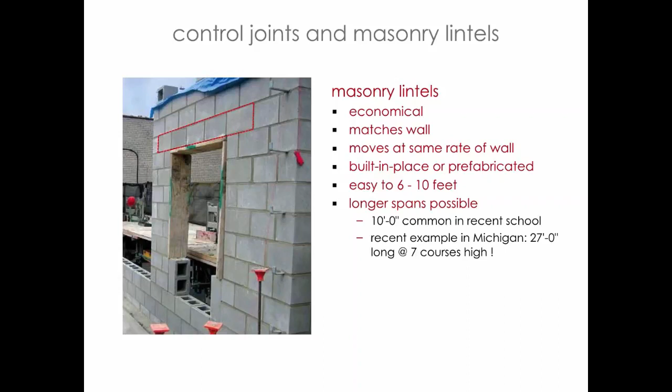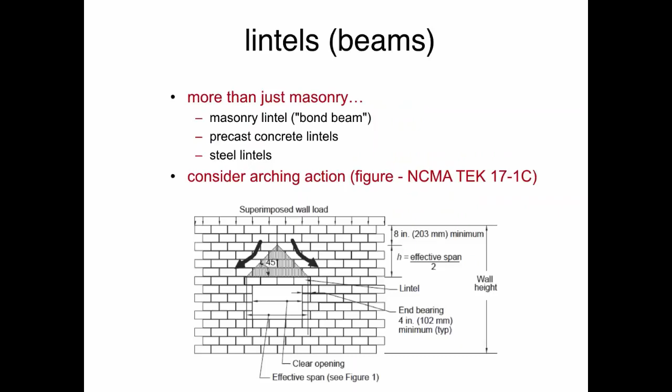When we have masonry lintels, also consider arching action - that's stuff we inherently get when we look at it with finite element analysis. But even if we're not, arching action occurs when you get those joints away from the openings, and that's really important in design. So again, you can just see this - if I peel apart the face shells and look at how that wall is going to be integral with the jambs and the lintels because of the overlapping reinforcement, it's just going to have a much more robust design.

Usually the reason people talk about steel lintels has to do with shoring, and we're seeing a lot of contractors moving to prefabricated masonry lintels to eliminate that problem, right?

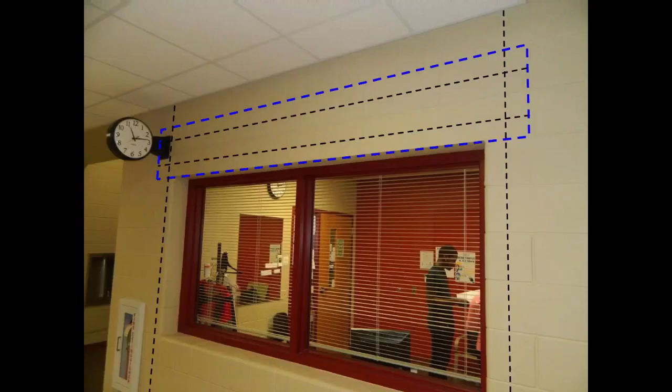And there's other solutions as well. There's better solutions than putting a piece of steel in there. I mean, it looks better. I mean, this is what it actually is, right?

Anytime I put a piece of steel in there—I was picking on wood and steel before by saying they're inferior, but I'll just say a steel lintel is a foreign material to masonry. What that means to me as an engineer is it's going to move differently. When it's thermally loaded or under different conditions, that piece of steel is just going to be moving around and causing problems within your masonry wall.

So that one little shoring issue that you maybe solve, you create a lot of other issues in your design.

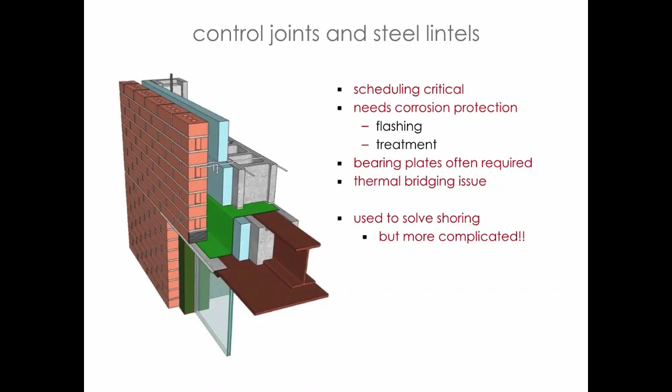I mean, we can do it. You can certainly put in the reinforcement. You can move over your jamb steel. You can add a U-bar in there around the anchor that's going to be in there for the steel. Maybe that's probably going to be in a slotted hole, to try to allow some movement. It's not really going to move too well, so we've got to make sure we reinforce this thing so that it doesn't have problems and we don't have compromised bearing conditions—that's not a good phrase to use around anybody standing under anything.

Compromised bearing. All right, so just in an elevation, you can kind of see that once we have the steel in there, we do have to address it. I've seen some cute details of reinforcing going through the steel, and the coordination and all the stuff that goes on—it's more difficult than it needs to be. It doesn't need the steel, and it doesn't need that control joint at that steel. We just have a lot of things we could resolve by doing a masonry lintel.

All right, flip through a couple more of these—control joints, and stair and elevator shafts. Those are also really, really big deals because I'm telling engineers to use them. Probably the biggest kept secret in design of buildings is all of this untapped capacity in masonry, and no more than in these stair and elevator shafts. Because we have them in there, they're robust. They have all these great architectural features that you guys want to use them for—fire resistant, resistant to abrasion and stuff hitting them—just good elements within the building. And when an engineer doesn't use them, it's just so much wasted capacity.

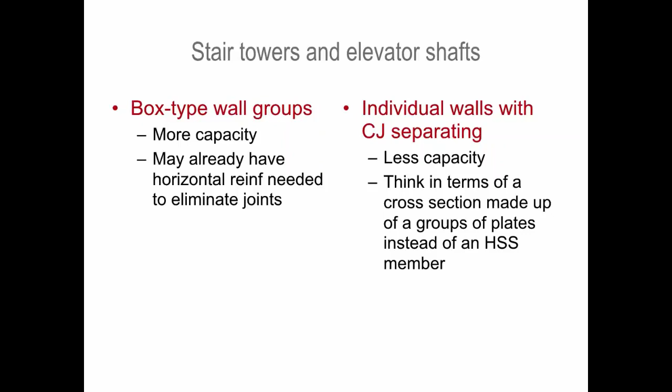But again, I see things sneak into projects where I'm just not sure where they come from—let's just make sure they don't end up here, because we're using them more. Engineers are realizing this capacity, simplifying your designs. When you have that big steel brace that you don't like looking at through your window, ask the engineer: are you using your stair and elevator shafts, your masonry stair and elevator shafts? I'm giving this to you as a gift.

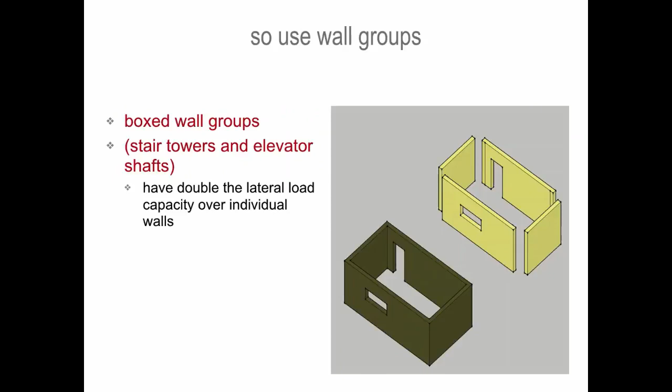Use it. So box wall groups have double the capacity of individual walls. Once I start throwing joints in there, all of a sudden these become individual panels that just don't have nearly the capacity we would otherwise have. Stuff that's 2 to 12 stories tall—we can easily get these box wall groups that are going to be in there anyway, just due to the use of the building. You don't need to add a lot of, or any, other lateral support within these designs.

So again, control joints, movement joints—I have a couple slides here on NCMA. It's different between veneers and backup, or unreinforced and reinforced wall, right? They just work fundamentally different.

They're just different elements that require joints in different locations—some expansion joints, some control joints. They affect the structural capacity in those backup walls quite a bit, but it also has to do with how they match up, because they shouldn't align and they don't align. So we have to have some coordination anytime we have a connection of the veneer to the backup. I agree it's a complex issue, and we want to make sure we understand it, not just oversimplifying things to oversimplify them. Let the structure do all the work that it can do by not adding these control joints in places we don't need them.

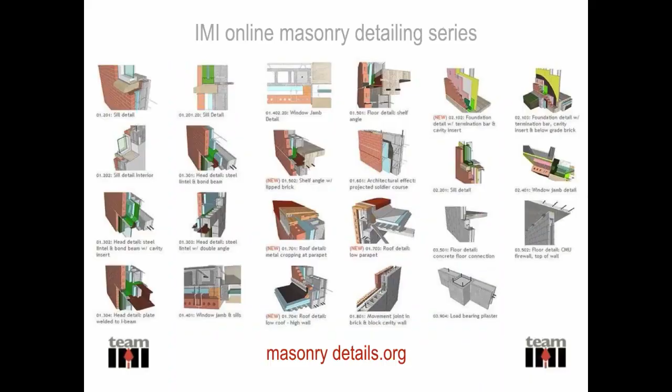A lot of the information I presented to you guys is in these NCMA tech guides, and this presentation is going to be available online as a PDF—it's live on my site if you guys want to go see it. All of this stuff is freely available to you, so make sure you use it. The tech guides are just here within NCMA. This isn't stuff that took thousands of hours of research for me—it's using the guides that are in there and applying the principles with software, finite element analysis, to the robust tools you have for structural engineering to get efficient designs. So lots of stuff there for IMI and NCMA.

Do you guys have any questions?

Yeah, go ahead, it's more of a comment. I'm a mason contractor, and I want to thank you for reiterating that it's up to the architects and engineers to locate the control joints. I can't tell you how many times we're asked to supply shop drawings for control joints because it's in the specification, or we're told to follow some tech note or guideline. We push back, and often the general contractor pushes back on us, and it ends up being an unnecessary fight over whose responsibility it is.

So just to reiterate, the comment was from a masonry contractor talking about the importance of making sure these joints are specifically located—in your elevations for veneers, in a structural elevation for that structural wall if they're doing elevations, or at least on the structural plans. It's more complicated than a note—not that complicated, but more complicated than a note. There's so much variability; even if they locate them per spec, that doesn't necessarily meet your design intent. I think it's really important that we as designers carry that responsibility through. And it's code mandated, so that's a really good point.